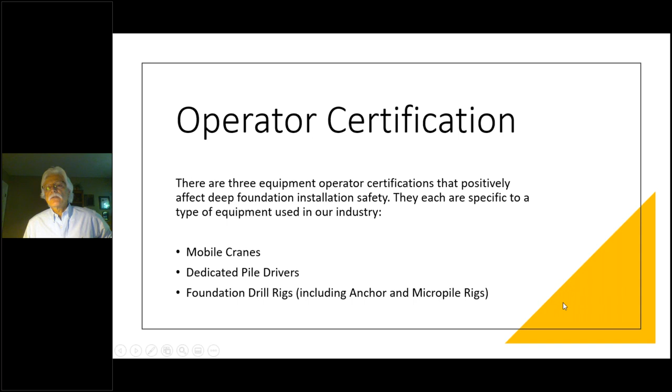However, at the time this was written, so this standard was written and came out in 2010, there was no definitive certification for a dedicated pile driver. So as we fast forward, one has recently been developed. Some of you are thinking, because of the term pile driver, that we're talking about a mobile crane with a pile driving attachment. And there's a difference there. So I wanted to make sure that we were clear on the differences of the two pieces of equipment.

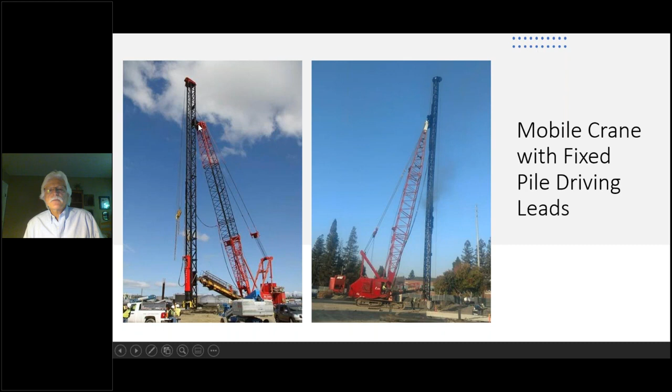And again, in subpart CC and some of the definitions, the term attachment. So this is referring to a mobile crane, but it may have, in our case, an auger or a drill or pile driving equipment. So to look at it, this is a lattice boom crawler crane, as this one is. This one has what's called fixed leads. So they're physically attached to the boom here, and also down here on the spotter. Same with here, this is the spotter. This is a physical attachment. So this is a mobile crane with an attachment.

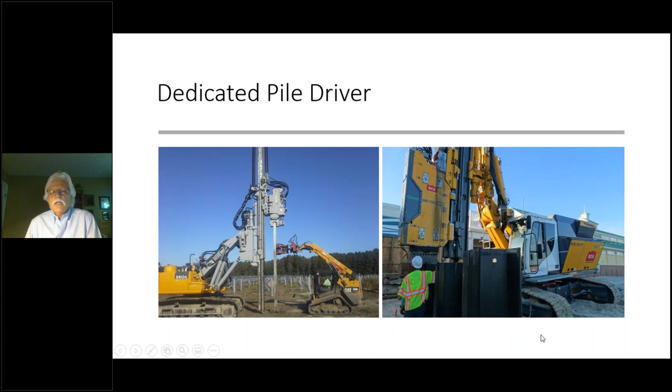So you have a vibratory hammer here. This is a much larger vibratory hammer. These are driving individual piles. This may be some sheet piles with interlocking H piles. All different variations of the same thing. But there's a true difference between a mobile crane with an attachment and a machine that's called a dedicated pile driver. So here we're driving sheet piles. This is driving a reinforced precast concrete pile. Similar machines, different from a mobile crane.

So we have a similar association out there. It's called the Pile Driving Contractors Association. They teamed up with the NCCCO to develop a new certification specifically for a dedicated pile driver. That certification became available in 2016. So you all know as compliance officers that there's now, throughout the country, a requirement for an operator of a dedicated pile driver to be certified for that type of machine, okay? So you now can be on the lookout if you see a dedicated pile driver in your area.

They're not terribly common on the West Coast, they're more common on the East Coast, but if you see a dedicated pile driver, the person in the seat should have, or shall have, in your terms, a certification for a dedicated pile driver.

ADSC, knowing in advance that certification for this type of machine was going to take place, opted as an association to get ahead of OSHA and create our own certification for a foundation drill rig. Internally we had numerous conversations, and we decided as an entity to create a task force.

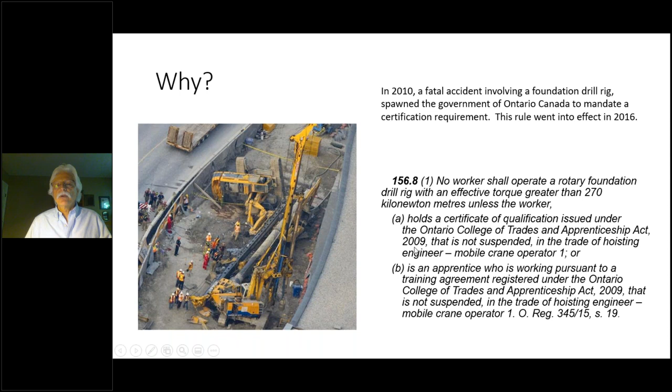A very large foundation drill rig hit a soft spot in the ground and rolled over. If you can see my cursor, this is the mast of the equipment - it totaled this machine, did so much damage that it totaled it. But unfortunately, underneath the mast here, right where these firefighters are, was a young man who was crushed running a small rubber-tired backhoe. This fatal accident triggered in the province of Ontario a requirement that the operator of a foundation drill rig have some type of certification.

Back in the States, historically, when we showed up on a job site as a contractor, someone from the owner or general contractor would probably ask to see some documentation that the person running the drill rig had some kind of training or authorization to operate it, and what their skill level and experience were. The typical response was for a contractor to write a letter on company letterhead saying our operator has X number of years operating this type of rotary foundation drill, maybe listing a couple of recent projects. That was pretty much taken for granted as good to go.

However, times have changed, we've advanced, and more owners and general contractors are asking more intricate questions. They want to know more, they want more documentation, they want to see records of training. So this is one of the things that triggered our association to get ahead of the curve and create our own internal certification.

It sounds like a great idea to become a certifying body. However, there's a lot more to it than just putting your name on a piece of paper and a stamp on it. We consider ourselves proactive and good at what we do, with a great working relationship with OSHA from a long history of working with them. So we decided, sure, we can do that, because we're contractors and we can pretty much do anything. Our motto is: we've done so much with so little for so long, we can do the impossible with nothing.

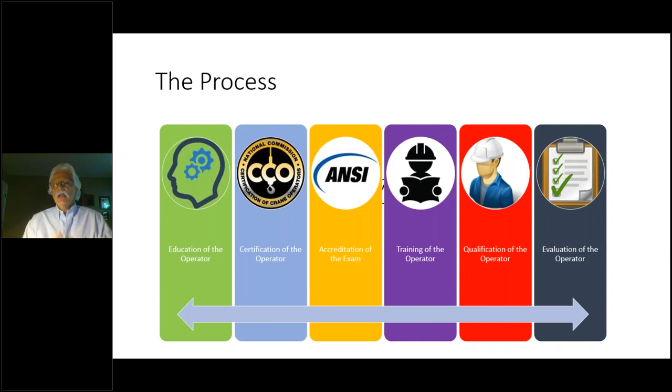Once you become certified, you then have to train the operator to operate the piece of equipment you're going to assign them to. Once they have the proper training, you as an employer need to qualify that and announce to the world, both externally and internally, that you have qualified this individual to operate that type of equipment. Piggybacking on the OSHA crane standard, we feel you must also evaluate the operator to make sure he or she can actually perform safe operation of the machine assigned and perform the tasks you ask them to perform.

So in the education, it could be schooling, both in theory and in practice. Ideally, the operator learns definitions and processes from either an instructor or a mentor. There's course material available and the opportunity to practice what they've learned in the classroom on an actual piece of equipment. Certification would occur after the individual receives appropriate education.

That education could come from a trade union, a trade association such as us, or some other educational institution. There are a few here in the United States.

Certification, the one you get from NCCCO, demonstrates that the candidate has skills and knowledge that subject matter experts have deemed necessary for the safe performance of a given type of equipment. The certification process was written by safety people, contractors, and subject matter experts in the field, in this case, the deep foundation industry.

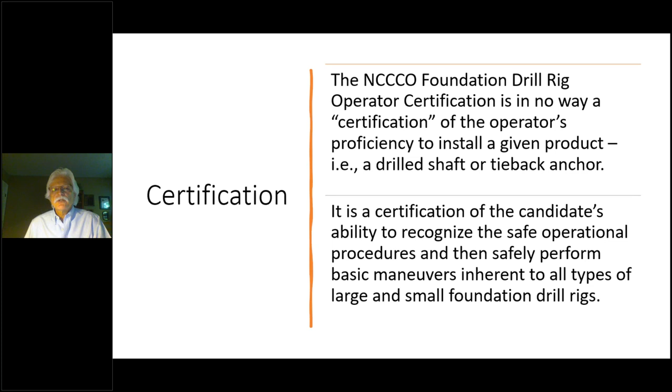NCCCO certification is in no way testing or certifying the operator's proficiency to install a given product, for example a tieback anchor or a drilled shaft. The certification is of the candidate's ability to recognize safe operational procedures and safely perform those basic maneuvers inherent, in this case, to both large and small foundation drill rigs. Remember, it's not a certification of how to install a product.

Accredited—ANSI has a very rigorous accreditation requirement. That's why we teamed up with NCCCO. There's no way an association like ADSC can even begin to meet those requirements.

Training—ADSC provides training, and a contractor can provide training. Once you pass the certification exam and understand the processes, you need to be trained on how to operate the specific machine you're going to be assigned to. They're similar in nature, but often have different functions. The controls may be slightly different—the triggers, the levers, the computer systems—they're not all the same. So one has to be trained on each individual piece of equipment.

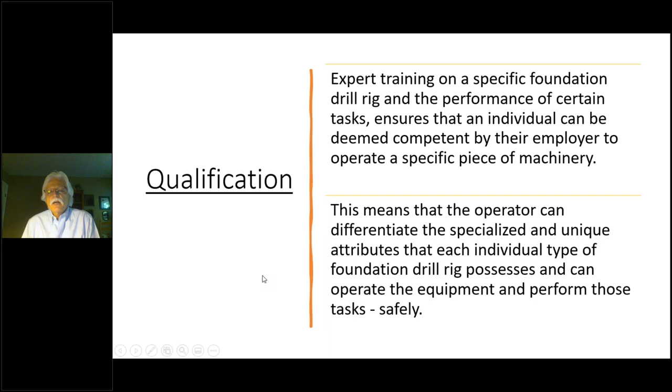Then the contractor should qualify that particular individual on performing not only operating the machine safely, but the tasks you're going to ask them to do. This means the operator can differentiate, so the more qualifications an individual can get, the more valuable they become to the contractor or employer. As I said earlier, based on the crane standard, we feel as a trade association that our members should also evaluate their operators if they're certified in foundation drill rig operation.

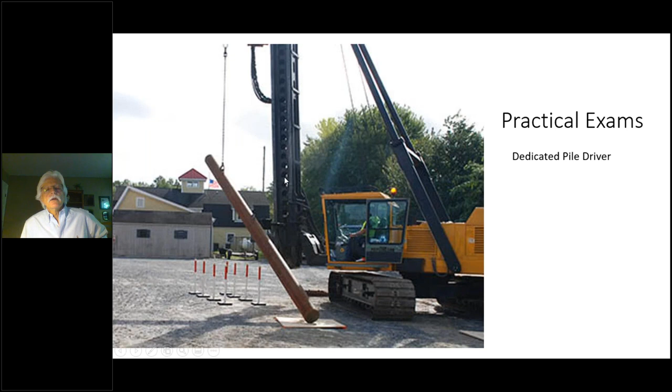This is a snapshot of a dedicated pile driver. Since they are cranes, they do lift things—so this is lifting a pile, you have to put it up underneath the hammer. So it's a fairly involved practical exam for each.

And do they police and check it? Most of it is on the honor system, but if someone files a complaint against an individual, NCCCO, because of their code of ethics, will respond and investigate to make sure the claims are either proven false, or if true, they may ultimately remove that person's certification.

Each of the certifications that NCCCO has have a 5-year lifespan. The Foundation Drill Rig Operator certification is likewise. You can recertify 12 months up into that time. You have to continue to meet medical requirements, follow the substance abuse policy, comply with the code of ethics.

You must pass the written to recertify. You don't have to take the practical unless you blow out of your 12-month window. For example, we are in the process right now - I'm on task force, we have to continually write questions because there's about 120 questions. As more people take the test and talk about the questions, we have to change them up or add new ones to make sure we're testing people's knowledge, not just a repeat of what someone else told them.

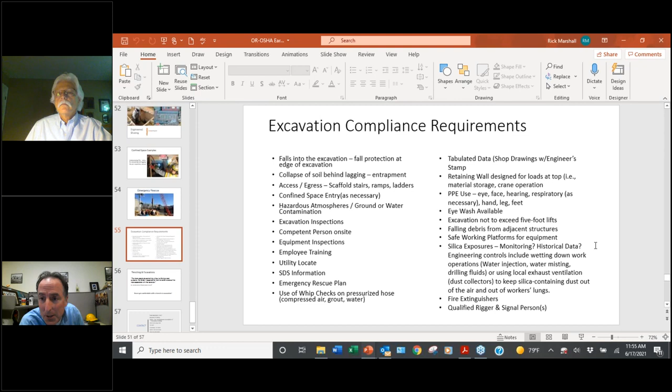Cool, how's that for a tease? I think they call that a tease in this business. Well, she's much better looking than I am, so that's a good thing.

Okay, so next up, we're talking about earth retention systems. Is that right? Yes, please. Okay, so here we go.

The whole trigger for this entire conversation was because this is excavation and trenching week in Washington, and I think in Oregon. So we want to relate it to that type of hazard that exists in our world. While you guys typically think of trench boxes, sloping and shoring and whatnot, we don't quite do that in the same way, so we want to describe it.

Based on some of the images you saw yesterday, you've seen some of these already. I'm sure you've been on job sites early on where you may have seen some of these structures already in place or actively being installed. So some of this may not be new to you, but we'll talk about it briefly.

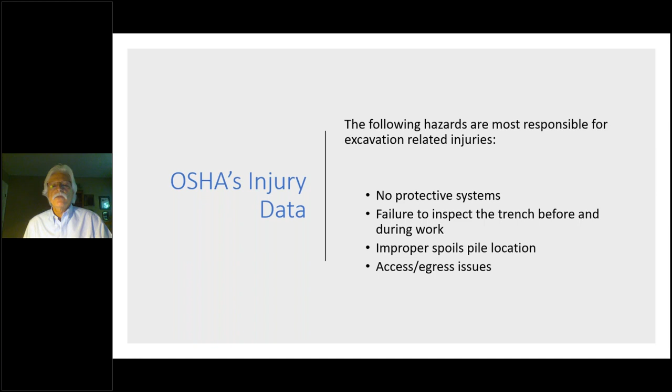Most of you are aware there are tragedies that take place, and it's interesting that 60% of someone who's injured or killed in a trenching or excavation accident is a rescuer. Could be a civilian, could be a coworker, could be untrained fire rescue personnel. It's an unfortunate thing, and it's not always just one individual. Sometimes responder number one becomes victim number two.

Cave-ins, as everyone hopefully is aware, can happen without warning. And all fatalities, I think most of you would agree, could have been prevented had we taken the steps to do so. Are there employer responsibilities? Of course there are.

We've got to provide training to employees who may be exposed to a hazard associated with trenching or excavation. That's such an easy statement to make, but unfortunately we don't seem to see a lot of that taking place, especially when you read some of the fatality reports that OSHA, Oregon OSHA, and Washington publish. We're supposed to, as an employer, educate, train, and then assign a competent person to be on site whenever trenching or excavation operations take place and we have exposure. The employer has to provide the necessary means, methods, and protections for all employees to safely enter, perform their tasks, and then properly exit the trench or excavation.

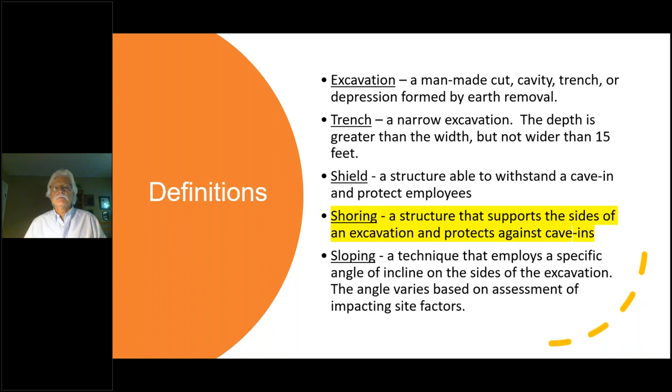We're going to talk about shoring here because it's one of the protective measures an employer can use to protect their employees from hazards. Shoring can be—most people think hydraulic, mechanical, or timber shoring—but we're going to advance that to another type of methodology. Employers shall protect employees from cave-in by using adequately designed protective systems. So we're going to show you some variables you might not be used to.

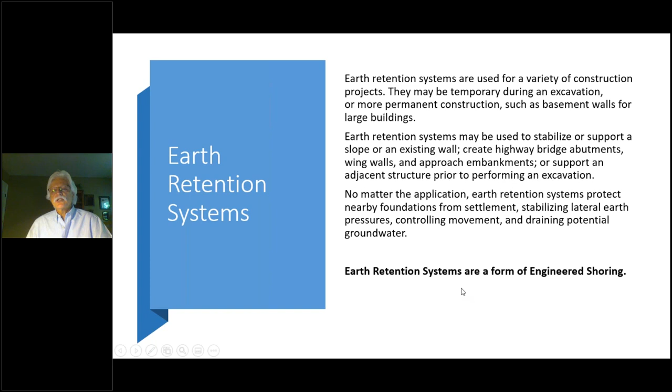We're going to talk about earth retention. Earth retention systems are used in a variety of construction projects. They could be temporary, or might be part of a permanent wall—most of the time in a basement for a smaller or large building or other structure. You've seen them on highways at the approach to overpasses. They may be used to stabilize or support a slope or existing wall, highway abutments, wing walls, embankments, or to support an adjacent structure. No matter the application, earth retention systems protect nearby foundations from settlement, stabilize lateral earth pressures, control movement, and drain potential groundwater. So in a sense, an earth retention system is a form of engineered shoring, to use OSHA speak.

Many different ways you can create that in our world: we can use sheet piles, soldier beam and lagging—Matt and Dan alluded to that yesterday—soil nails, shotcrete, bracing (internal and external), CFA or auger cast piles, secant piles, diaphragm walls, and chemicals. So let's take a quick look.

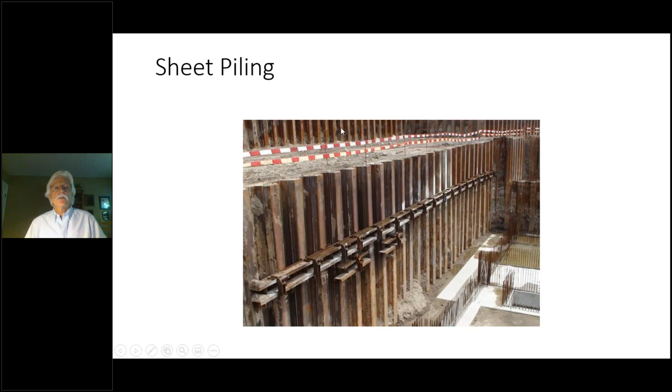Finished product—so we have the driven sheet piles. They've excavated out behind here; you can already see the foundations going in for the structure. So this is holding back the earth. We have some form of anchor system put through here—they've drilled through the sheet pile wall to anchor it back. This is a two-stage wall; we have the lower and upper levels here. So this is a pretty complicated job site.

You guys typically look around and you're looking for footprints up there. And when the contractor says, we don't have anybody up there, then you have to ask, how come I see footprints? You guys are sneaky sometimes.

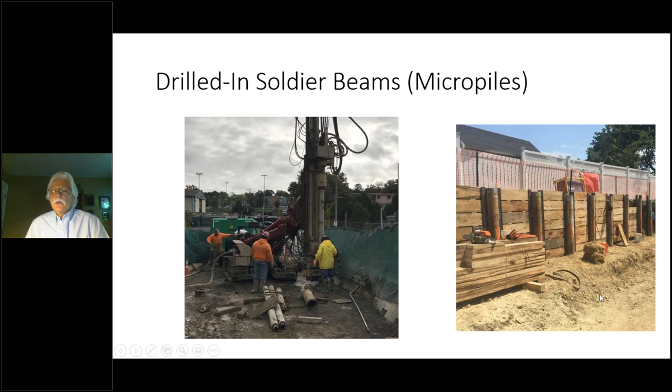Why do you do one over the other? Sometimes it's economics, how fast can you get to a job site, what equipment does the contractor have. Some months steel is really expensive, so concrete is the way to go. Other cases, concrete is way higher or I can't get it, it's not readily available, so you might drive piles instead.

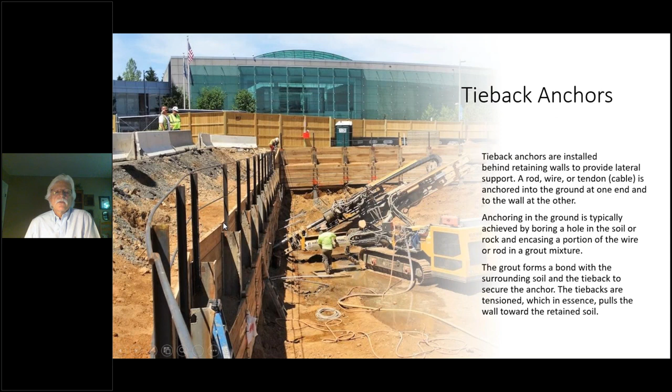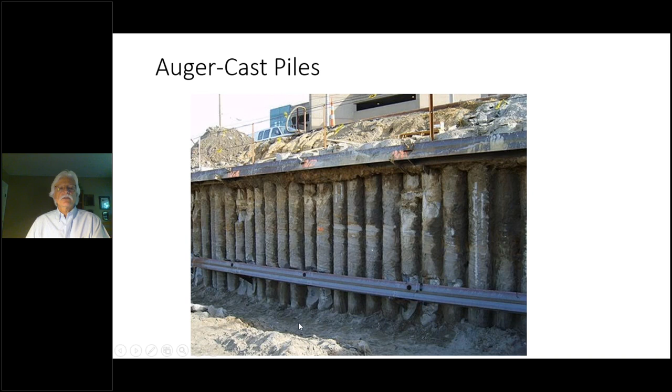Somebody from your organization asked about chemical grouting. So chemical grouting is a soil stabilization technique that uses typically, not always, a polyurethane chemical grout injection. So what am I talking about? Think of that like that expanding foam that you put in between your windowsill or a door frame or something like that. It's a product somewhat similar to that, only it's a lot more refined.

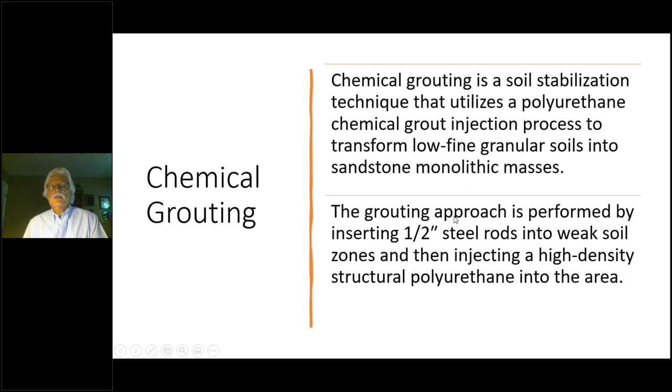What it does is it transforms fine granular soils into sandstone monolithic masses. So this tells you right now, it only works in granular soil. If you have hard clay, it won't do a thing. But if you have fine granulated material, gravel, sand type of stuff, this is a technique that you can use.

What do you do? You literally jackhammer a 1/2-inch diameter pipe into the ground in a grid pattern, and then you inject the chemical grout through there. And as you're injecting, you jack the pipes out. So you're pressure injecting this grout. So it looks like voodoo here, but the end result looks like here.

There's a term that we have called jet grouting. This is a method of ground reinforcement that uses a high velocity jet of grout, sand, cement, and water. Maybe not always sand, but definitely cement and water mixture. So what does it look like? Okay, so you have a drill steel. You can see these water jets coming out. So in this picture, they're cleaning the jets out with water.

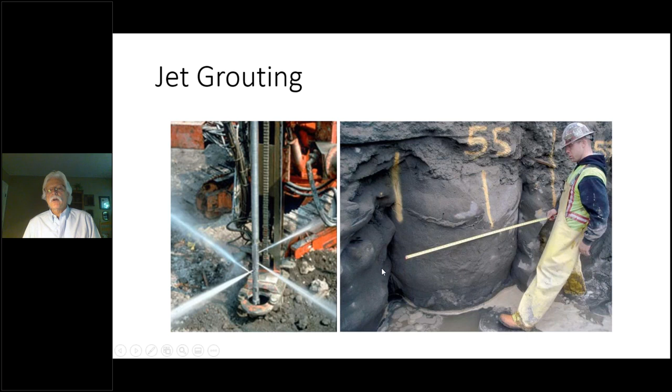But as this is drilling into the ground, grout squirts out under high pressure as it's rotating. And so you get an element that looks something like this, depending on the soil and the soil density. They may be larger than this, they may be smaller than this. But when you do these adjacent to one another, you can get a form of engineered earth retention.

There's a product called a diaphragm wall. Some people call it a slurry wall. This is just another methodology to create earth retention in our world. The trench excavation is initially supported by either bentonite or polymer-based slurry. So all these words say something, but it's better if you see the picture.

So how do you prevent that from happening? Well, you fill the void with this slurry. It could be made out of bentonite, which is a really fine clay material mixed with water, or it could be a polymer. So it's a chemical blend of liquid, water, and the chemicals. And what that does is it creates a stabilizing effect and prevents the hole from caving in.

So you're going, okay, well, how do you do that? Well, the weight of the bentonite or polymer mixture and the water together pushes out against the sides. So as long as you keep this full of slurry, you can continue to excavate and it will not cave in because of the weight of the slurry material pushing outwards against the excavated material.

Once that's completed and it's to grade, a reinforcing steel panel is inserted. Once that's to grade and everybody's happy, you inject concrete into the panel that you just excavated, but you siphon off the slurry mixture because you can clean it and reuse it. And once the concrete is to grade, it will harden.

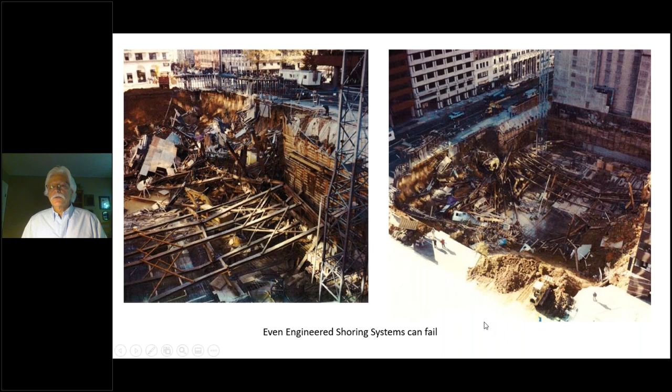Something everybody knows, excavations are the greatest risks: asphyxiation due to lack of oxygen. So there could be a lack of oxygen in the excavation, or the weight of the soil is crushing you to the point where you cannot breathe anyway. Could be some toxic materials. There could be a fire inside of the excavation. Moving machinery along the edge of the excavation could cause a collapse because soil vibrates, and I guarantee you, if you give soil a chance to move, it will.

Accidental severing of an underground utility. There have been a lot of people who've been killed by drowning because not only did the cave-in crush them, but it also broke a utility line, and then the trench or excavation filled up with whatever liquid was inside the utility line.

Earlier, we talked about having a competent person on site. That individual, by OSHA standards, has to be able to determine soil classification, has to understand the use of a protective system, and they better be fully understanding what the entire standard says, not just nitpick the important paragraphs, okay? Most importantly, they have to be capable of identifying a hazard and be authorized to immediately do something about the hazard, okay?

A lot of people get the first part: yep, that's bad, but they may not have the authority to eliminate the hazard. They can't stop the work. They can only tell somebody about it. This may be one of the reasons why people get injured or killed. However, what if the competent person is actually watching unsafe activities take place? That's not a good thing.

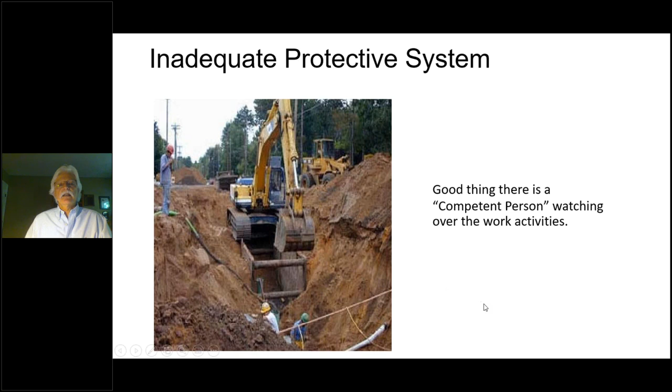So if you're a contractor, if you're an employer, you better make sure that your competent person is indeed just that and will not tolerate or allow an environment such as this. Okay, I don't even have to describe how idiotic that is. So we'll just move on.

One of the things a competent person has to do or make sure gets done is we have to inspect. So a lot of earth retention contractors that are ADSC members are compliant with this requirement, but some are still confused and they say, well, we didn't dig it, so why do I have to inspect it? Well, if you put people in harm's way, if you expose them to the hazard, in this case an excavation hazard, then you need to inspect it to make sure it's safe for your people to work in it.

So ADSC has this form. It's not perfect. It's malleable. You can change it to better suit your needs.

But we got to make sure before the shift starts. And if we have an incident take place, we have rain, we have snow, we have high winds or something like that. Water makes the soil wet and gooey. Sunshine dries the water out. So when you evaporate water, it leaves voids in the soil. So you may have a potential collapse, even though it's a beautiful sunshiny day. It's interesting how water can work for you or against you all in the same week.

And you can reasonably anticipate whether or not an employee is exposed to hazards by doing what? By inspecting before you put people in the excavation. There could be a hazardous atmosphere in there. Now, if you're working on sewage lines, probably a good bet, but if you're doing an excavation in the middle of a cornfield, it may not be. But there are some natural contaminants as well. So if it's deeper than 4 feet and you suspect, obviously you need to check.

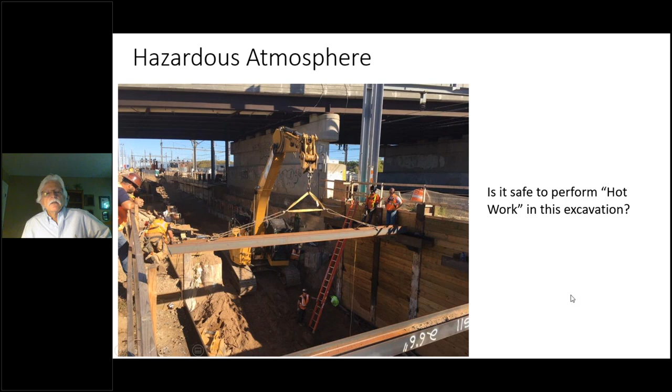So here's a typical urban. We're working underneath this overpass. They're maybe going to widen the road, maybe build another bridge, maybe widen the lanes. I'm not sure what's going on here. We have earth retention, but we have people down inside this excavation. We have equipment operating inside this excavation. Did we do an air quality check to make sure we're not, in this case, having a carbon monoxide exposure? A question to ask if you're a compliance officer and you roll up on this particular job site. Might question their rigging skills as well.

At depths deeper than 4 feet, you got to have ladder access or some kind of access in and out of the trench or excavation. At 5 feet, you must slope, shore or bench, do something to protect the employees. You have to travel no further than 25 feet to reach your access or egress point. And if you use a ladder, it has to extend 3 feet above the lip of the trench or excavation and be secured. This is an improper way for access and egress. Okay, it's clever, but not appropriate.

Yesterday, we talked a little bit about underground hazards. Since we typically drill into Mother Nature, to find something like this would be somewhat alarming. So make sure you call before you drill, in our case. Physically locate prior to drilling. Just because there's marks on the ground doesn't mean they've located every single utility. So as Dan and Matt both mentioned yesterday, it's far better to pothole to make sure you haven't found something that no one knows about.

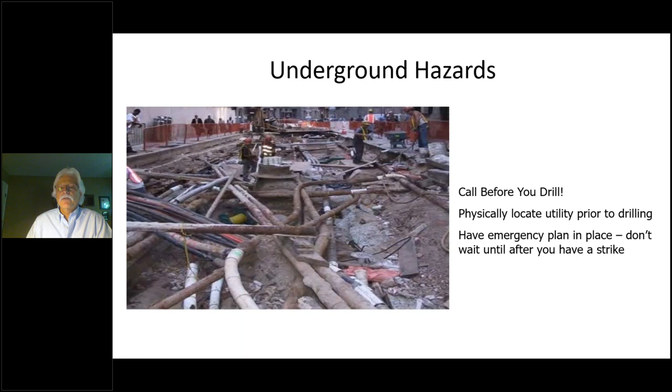Pretty key elements, proper planning. Okay, if you fail to plan, then you plan for failure, so to speak. Call before you drill. Pothole. Should have a site-specific hazard analysis to make sure you've covered your bases. And you better make sure you have an emergency action plan should you damage a utility. Oftentimes people do all of those, but fail to have the phone number for the gas company, electric company, the water company. They don't have those numbers posted in their job site trailers. So it's a good idea to have them. Calling back 811 isn't going to be a very fast response.

Hopefully everyone listening understands the weight of soil. If you have a cubic yard of soil, so you have 3 feet by 3 feet by 3 feet, that can weigh 2,700 pounds, depending on the density and the water content of the material. So let's just say 3,000 pounds. That's a significant amount of weight in a block of soil.

A skid steer with a 1 cubic yard bucket, if you filled it up and dumped it out on the ground and showed a typical field person, they would scoff at you telling them that pile of dirt weighs 3,000 pounds. But if you showed them a small pickup truck, they would say, oh yeah, I believe it weighs 3,000. It's the same thing. So which one would you like on your chest? The pickup truck or the pile of dirt? Well, hopefully they say neither.

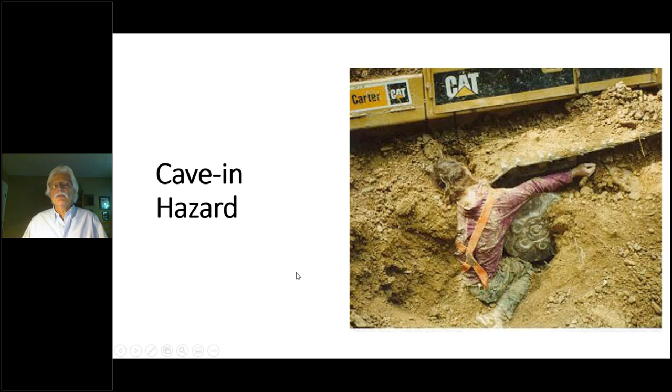And people who think they're going to be fast enough to get away from it, they're only fooling themselves. I'm going to try to show you this video. You got to pay attention to it. See this person right here? I hope you can see my cursor.

So how long does it take for a cave-in to take place? Well, you just saw one. You saw someone die. So I'll show you again.

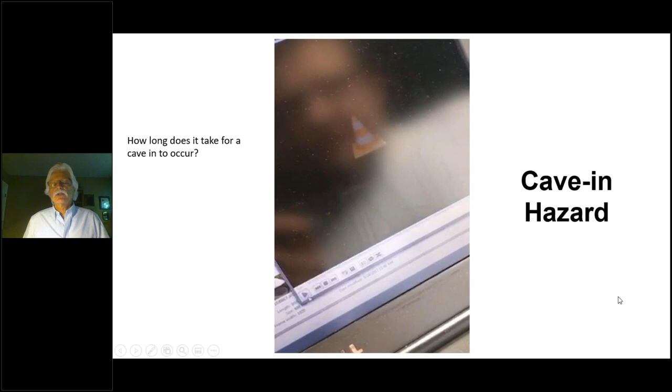Luckily, that gentleman had the wherewithal to grab onto the clamshell, and he was pulled out. It took not minutes, not hours, but most of the day. They worked well into the night to recover that individual that was buried. So unbelievable. So when people ask, well, how fast does it happen? Literally in the blink of an eye.

If you're installing earth retention like we've been showing you, a lot of people are right up next to it. They have to be here. So they're physically installing these boards. They're manhandling them. They have to get right up against it. But in some sandy soils around the country, oftentimes the material, just under its own sheer weight, boils out from underneath the earth retention.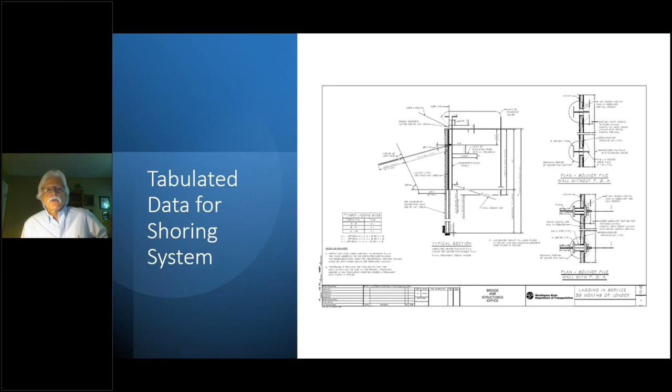So we know this about engineering shoring. We have to have what's called tabulated data, how to put in wales and whatnot. So the tabulated data for an earth retention project should be on the contractor's engineer drawings, shop drawings. There should be information on site indicating how the wall was designed, how it should be installed, what angles, how all the tiebacks in this case, the type of wood, the material, the thickness, all that should be clearly identified and on site so anyone can figure out how to install this and do it correctly and have it be safe to protect employees.

We try to limit in our world excavations to only 5 feet in depth. So how do you know you're 5 feet deep? If you're a compliance officer, most everybody I've ever met at a construction site is at least 5 feet tall. So if there's boards over the person's head that are working there, it's probably deeper than 5 feet. That's a trigger. It's what I use all the time. And I question people, how tall are you? Oh, 6 foot. Okay, so you have dug too deep.

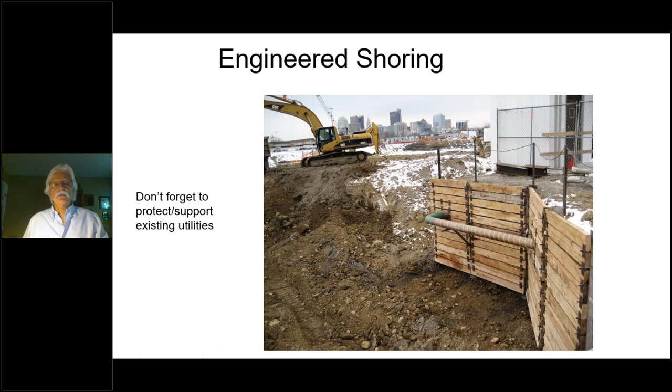Oftentimes there's existing utilities that you have to prepare and take care of. So this one is properly supported. This is a natural gas line, so we have to make sure we are extra protective of that. We have to be very careful.

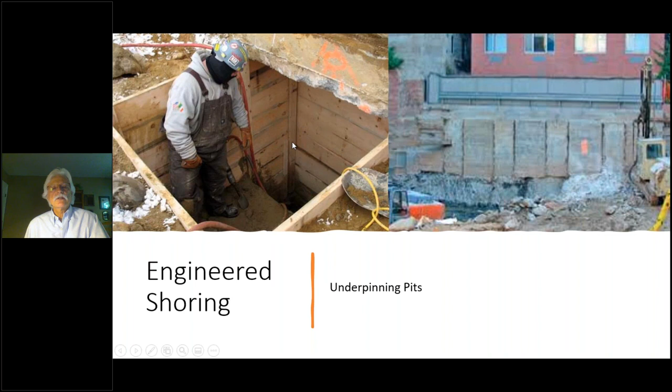This is an older picture, so you don't see any fall protection. I get that, you guys are all screaming, but this is the process. We've improved how we do that. We treat it as a confined space now, so you see we now have fall protection. In this case, this gentleman is wearing a respirator because he's possibly chipping out rock down there, so we want to make sure he's not exposing himself to anything foreign, particularly silica-laden material.

That job I told you about at the football stadium, when I worked for a contractor, we called Cincinnati Fire Rescue. They came out to the site and practiced rescuing people from underneath the seats of the football stadium. So we made it a point to have fire rescue come to the job site and explain to them what we were doing, how we were doing it. So in the event we actually called 911, they were prepared to do a confined space rescue.

I strongly recommend those of you who are listening that you do that for every excavation and drilled shaft project you do, because you never know when you're going to need help. And when they come, they need to know what to do.

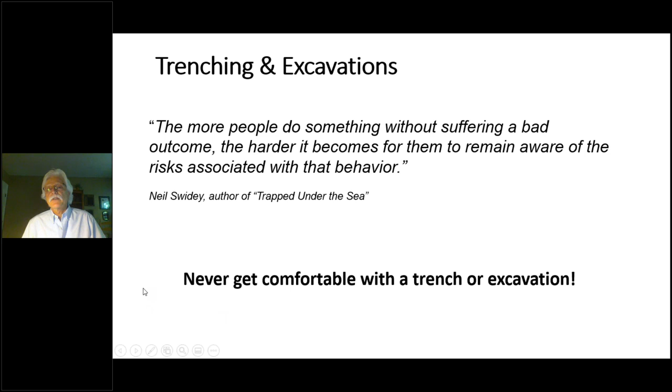A friend of mine made this comment in the book he wrote, Trapped Under the Sea: the more people do something without suffering a bad outcome, the harder it becomes for them to remain aware of the risks associated with that behavior. So I'm just warning everybody to never get comfortable with a trench or excavation, because it literally can turn around and kill you.

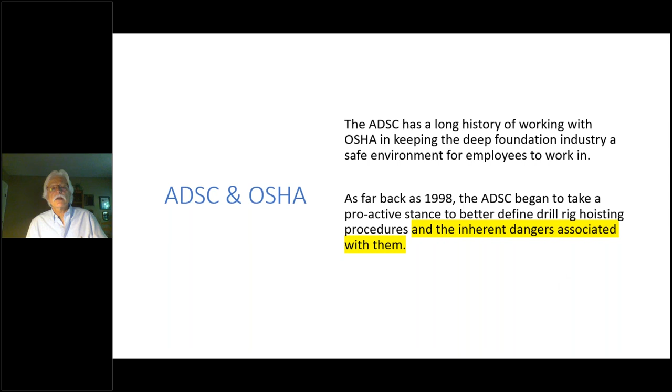We work with many, many drill rig manufacturers to create informational procedures and warning labels. We actually created warning labels and had language inserted in numerous manufacturers' operators manuals to indicate that a dedicated drill rig is not a crane, but if in fact you lift loads with one, you have to do it within the prescribed methodology that the manufacturer says. We have extremely limited ability for hoisting, and that has to be clearly defined by the manufacturer.

So during 2003, remember subpart CC was put into effect in 2010 - this gives you an idea of the timeframe, how long it took to create. In 2003, members of ADSC were invited to speak at the CDAC, the Crane Derrick Advisory Committee.

We made a presentation at a public hearing to talk about dedicated drill rigs and why we felt they should be excluded from subpart CC requirements, i.e. being defined as a crane. We told the audience that because drill rigs have limited hoisting capacity, extremely limited working radius of the suspended load, and limited ability to do what most people call a load chart, they are basically an ineffective piece of equipment to use as a crane.

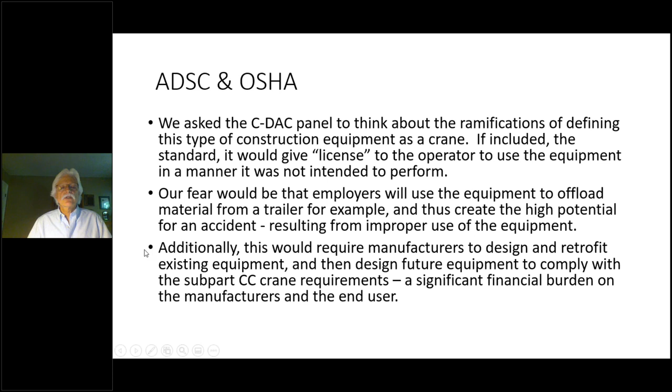I'm going to try to explain that. First, a little bit about what foundation drill rigs are. All these machines I'm going to show you are basically designed to install what we call a drilled shaft. Some people call them drilled piers, some call them caissons - they have several different names. Essentially, we auger a hole to whatever diameter and depth, extract the material, and then backfill that excavated cylinder with concrete and reinforcing steel.

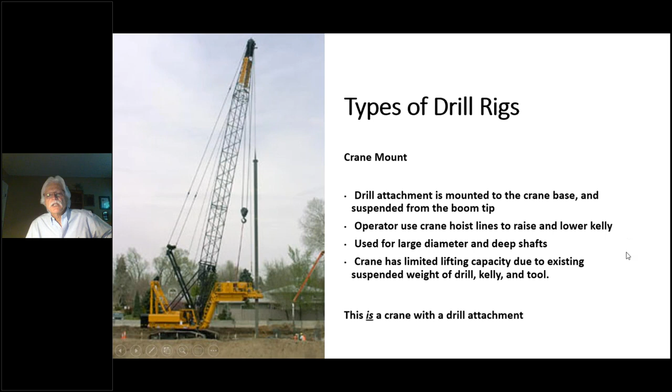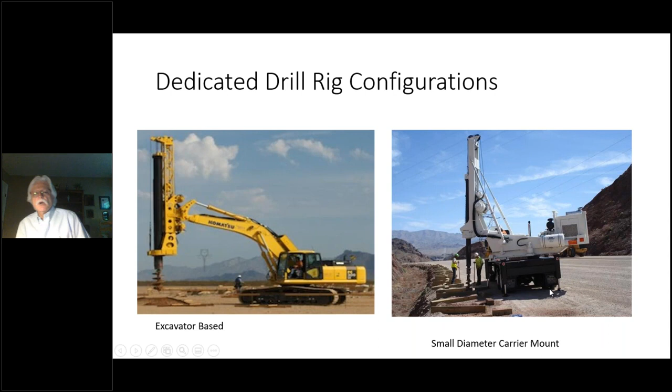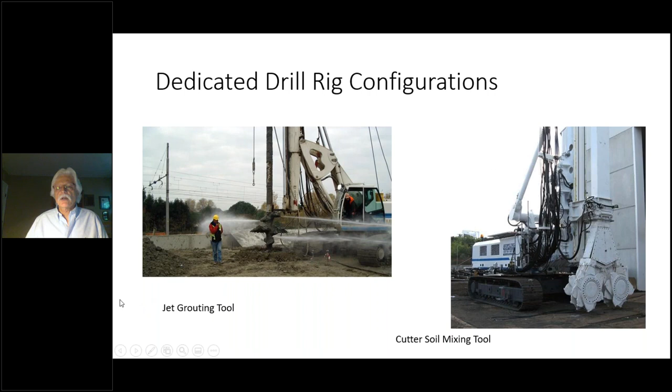Yes, this morning I showed you the jet grouting tool. So here's a larger version of the same thing. They're washing it out as we speak. So you can see the jets of water coming out. This attachment is called a soil cutter wheel. So again, it's on a dedicated drill rig, but a different technology used to install a different product.

Now, any one of those machines, if they're equipped with an auxiliary hoist, has the ability to lift objects. Some people use it to lift that casing that I just described that they can attach to the rotary and then install it as they're drilling. Some machines are used to lift a reinforcing steel cage. Okay? So there's several different things that this machine physically can do. The manufacturer indicates what you can do with their machine. Just because it can physically do it doesn't mean you should do it.

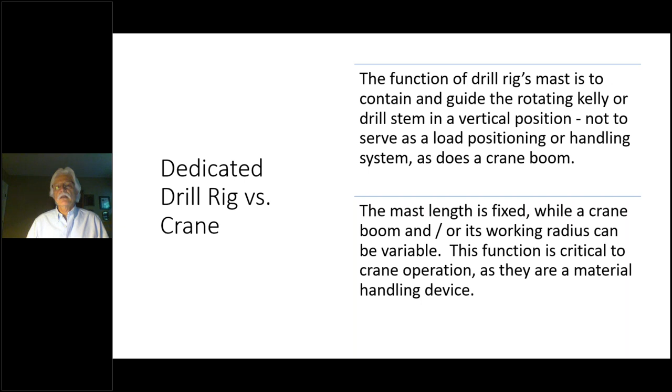So part of our argument to OSHA was that the function of the drill rig's mast, this piece right here, is to contain the rotary and keep the rotary and the Kelly bar in a vertical position. It's not to serve as a load positioning or handling system, much like a crane boom is. The mast length is fixed, while a crane boom, especially a telescopic boom crane, can change its radius in and out quite a bit. A dedicated drill rig has a very limited ability to increase or decrease its working radius. So technically speaking, it's a pretty poor material handling device because of the limitations that it has.

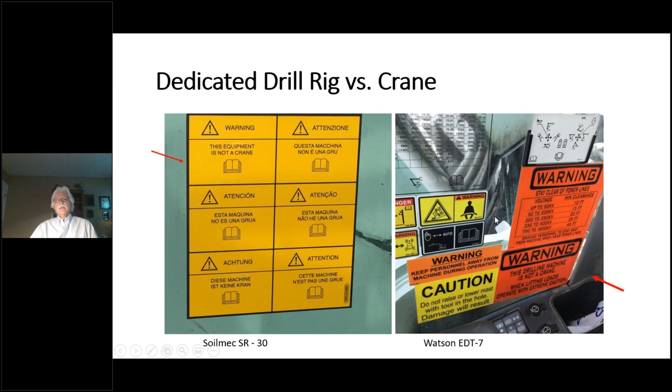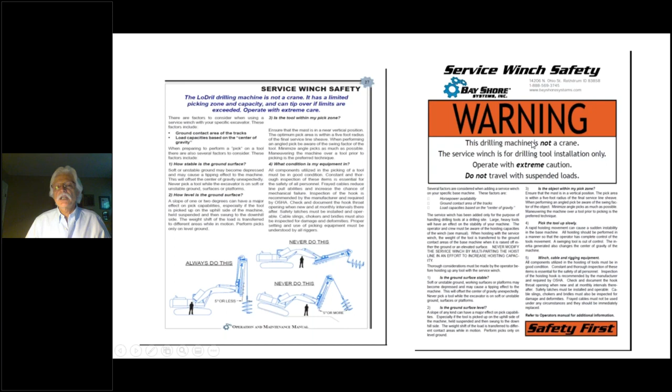This is a page out of their operator's manual. This is another page out of their operator's manual. Notice it's almost the same identical warning sticker that we created. So not only is it in their machines, but it's also in their operator's manual. So I just discussed the 5 degrees of verticality, so it's pretty limited.

There's not a specific standard that I can remember off the top of my head in federal OSHA that cites that you must follow the manufacturer's recommendations, whatever it says in their operator's manual, but that paragraph has been cited numerous times. It's also going to be used for a general duty clause. So basically, if you have an operator's manual for any piece of equipment, a handheld drill for that matter, and you're not following what the manufacturer tells you to do, it's at a minimum, in my opinion, a general duty clause violation.

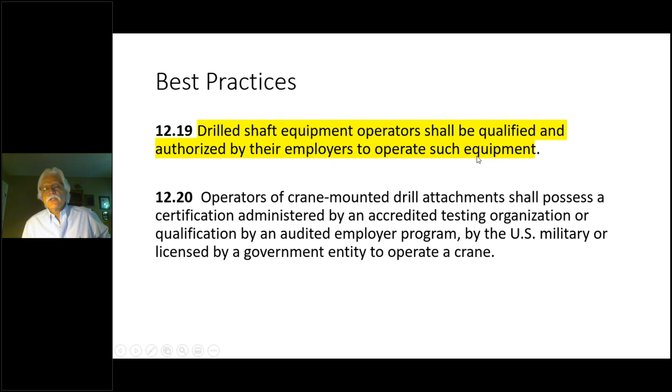Drilled shaft equipment operators shall be qualified and authorized by their employers to operate such equipment. I don't know if I mentioned to you when I talked about the NCCCO certification that the foundation drill rig certifications are voluntary. They're not mandatory, they're voluntary. Dedicated pile driver, definitely mandatory. So we worded it so it's not mandatory because at the moment it's still voluntary.

Assuming that the manufacturer allows the use of the auxiliary winch for lifting loads, we as ADSC strongly recommend that a lift plan is created. I think Matt yesterday, when he was talking about lifting reinforcing steel cages, talked about creating lift plans to do that. Well, we strongly recommend and encourage that if you're using your dedicated drill rig to lift something other than the tool, the contractor that's doing it creates a lift plan for that physical operation.

So what does that mean? I don't think it's on our website, but I have access to a generic lift plan made specifically for a foundation drill rig. I offer it to people all the time. If someone in the audience wants to see a copy of it, I have no problem.

But if you roll up on a site and you see someone using a dedicated drill rig to set soldier piles or lift a cage or do whatever they're doing with it, it might be a question to ask if the manufacturer allows that and what is your policy on doing that. I'm trusting that a prudent ADSC contractor member would already have that information on hand, but hopefully you don't run across it, but I would suggest that you ask the question.

Just because we have an exclusion from subpart CC, that's the actual exclusion number for a dedicated drill rig, that doesn't mean we don't have to comply with other requirements. Matt and Dan both talked about fall protection issues around a drilled shaft. We have exposure to pressurized lines on hoses. We have housekeeping issues that Dan talked about. We have training requirements. We have rigging training requirements. We have potential confined space entry and emergency rescue requirements that we have to comply with.

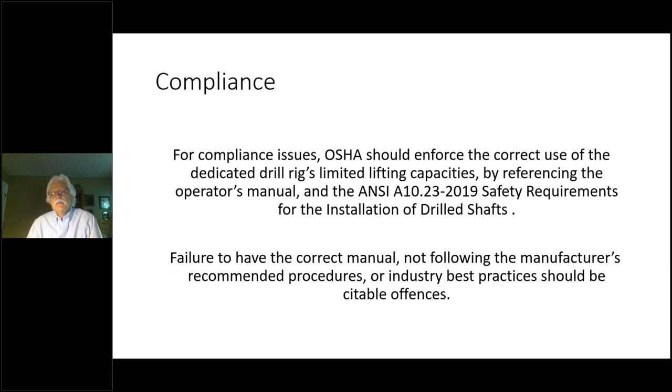But failure to have the correct, or not even have a manual for operating the equipment in question, that might be a citable offense. And not following what it says, if it says specifically do not do this in the operator's manual, and then the contractor is doing it, that's a shame on you kind of a situation.

So 1926.20 requires you to develop a safety and health program and have frequent regular inspections by a competent person of the job site, materials, and equipment. And .21 talks about training about the hazards that employees might be exposed to. So that's all a part of working around a foundation drill rig. So, several conditions. I'm not going to tell you how to do your job, but I'm just telling you that the general duty clause might be something that you might have to use if you see someone using a foundation drill rig inappropriately.

So just to brag on our association, if you've ever sat down and read a Federal Register, they're quite entertaining. But if you need to sleep, I would recommend you read it. But in the August 9, 2010 one, if you read it, you'll find that a trade association supported the proposed exclusion. So that was what I was trying to explain to you. So we got famous for 15 seconds anyway.

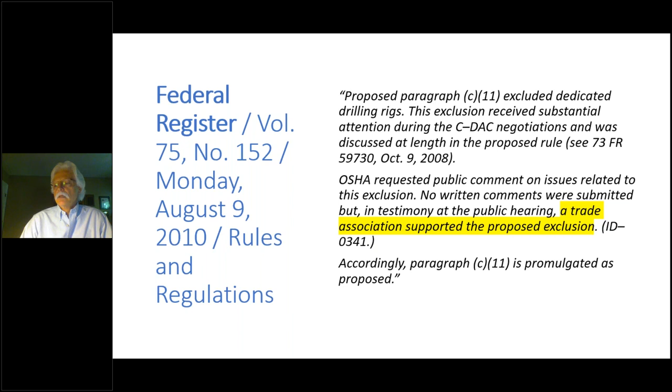So if there's any questions about the difference between a mobile crane and a foundation drill rig, I can take that if you want, or you want to wait to the end, your choice. Rick, I do not see any questions in the queue, so please carry on, my good friend. Okay, oops, we'll zoom on here.

Short story, when I was a small child, my father worked for a foundation contractor. He took me out to a project and I sat on the lap of the crane operator as it was driving piles. It was a very cool day for me. That happened a long time ago and I have a very vivid memory.

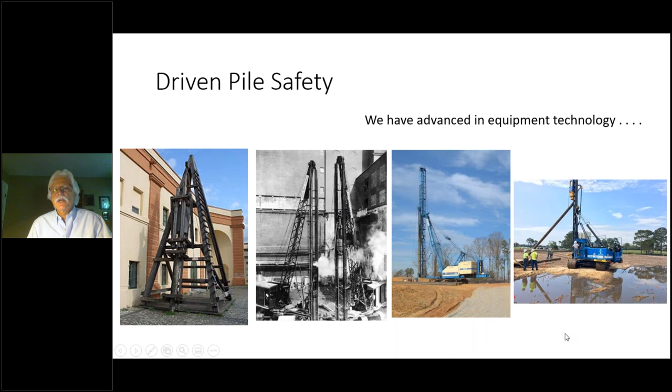So there are many different mechanisms in place in our deep foundation industry to install a driven pile. There are some regulations out there. OSHA has regulations on pile driving - they're pretty old, pretty minimal. There's an ANSI standard for driving and extracting piles. And for those of you who've worked on an Army Corps of Engineers project, the infamous EM 385-1-1 also talks about driving piles.

Hopefully everyone in the room is familiar - ANSI standards are not law, but they can be incorporated by reference. There are several incorporations by reference about cranes; B30.5 comes to mind, so it's not uncommon for OSHA to do that. Army Corps of Engineers standards are also not law, but you definitely must adhere to them if you're on a Corps of Engineers project.

The Pile Driving Contractors Association, which I mentioned earlier, has what they call a Pile Driving Safety and Environmental Best Practices document. It's available on their website. If you want a link to that, I'll give it to Craig and hook you up with it - just remind me, Craig, if that's what you want to do. And then there are standards from OSHA, but they're kind of limited and very outdated.

You've seen these pictures before, so I'll blow through them here. This is fixed leads - the pile driving leads are actually attached to the crane at the boom tip, and also to what I call a spotter down here at the base of the crane. So we have pretty limited reach or working radius, but you get a tremendous amount of control when driving the pile. The operator sitting in the seat has to be certified for this, a lattice boom crawler crane - not for driving the pile, but for operating a crawler crane. But just because they're certified doesn't mean they've been trained on how to operate a crane with all this attachment, and how to safely drive a pile with it all attached to the lattice boom crawler.

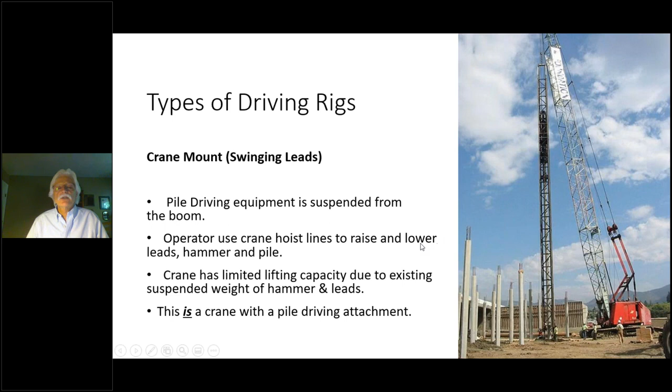This is similar, only instead of being fixed, these are swinging or hanging leads. Again, the operator is certified for a lattice boom crawler crane in this case, but must be trained and educated on how to use this type of equipment - it's pretty tricky to lift. You see these leads in a vertical position, but at one time they were assembled lying down, so how do you lift them without destroying them? That's a skill, a technique you need to be educated and trained on. Hoisting the hammer into the leads is a skill. Knowing when to shut the hammer off or when to do this or that is a skill you have to learn - you just don't get it because you're certified to operate a lattice boom crawler crane.

A vibratory hammer rotates eccentric weights, causing the hammer to vibrate. When the hammer vibrates, it drives the sheet pile, in this case, into the soil using the weight of the hammer. These sheet piles are driven to grade and being installed—it's a technique, believe me.

The whole assembly is usually held by a mobile crane, but you'll see more and more that dedicated pile drivers are in use.

One thing it does do: if the hammer is not inspected and not operating properly, it will cause vibrations to be transmitted from the rigging back to the hoist line, back into the crane. So as compliance, you might want to check that they're doing pre-shift inspections of not only the hammer and the power unit, but of the crane.

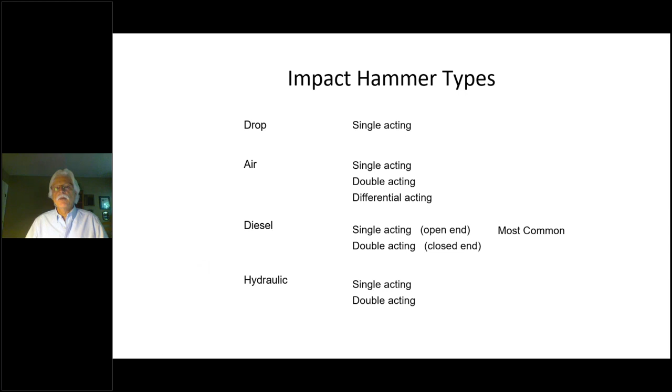The last pile driver you'll see is the dedicated pile driver we talked about earlier. Again, there are many different variations of the same thing, but this operator and this machine have their own certification—not crane certification, but dedicated pile driver certification.

Dedicated pile drivers have their own set of standards in subpart CC. There's not a lot, but there's some in there. OSHA clearly understands these pieces of equipment exist. They were unable to get them excluded from being defined as a crane, but they do have some lifting capability, so it's probably a good idea to know the rules.

This machine, like most, has a pretty brief load chart. It will tell you the angle of inclination the mast can be at. It will probably tell you that in order to do that, you have to put the mast onto the ground for greater stability. It may limit how much weight you can use and what kind of radius, and it may forbid you from walking. Depends on the manufacturer.

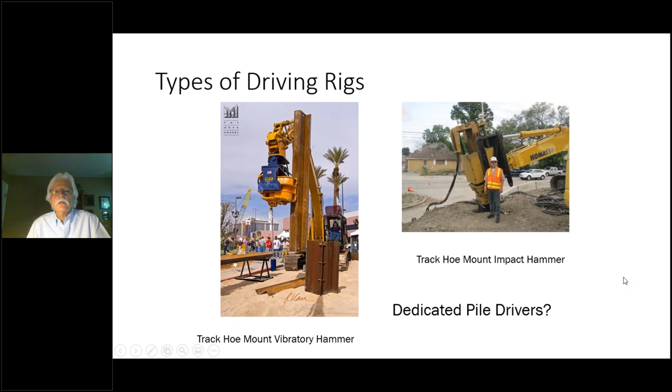Employers are expected to consider any existing consensus standard - that's what we talked about, the ANSI standards. Even though they're not legally required, consensus standards represent what experts consider a safe operation. So in my opinion, you should comply with voluntary standards, much like you should comply with OSHA standards, in our case here in the States.

So we talked a little bit about that. In the ANSI standard for pile driving and extraction, it tells you the contractor should develop a written site-specific safety plan. That plan might incorporate how to use this type of hammer. We talked about call before you dig, so I won't dwell on it. But it talks about how you may see a mobile crane, typically with a power unit mounted to the rear of the machine.

But this is weight that goes beyond the crane's counterweight. So does this manufacturer allow you to add additional counterweight and still not affect the crane's rearward stability, as crane manufacturers call it? Maybe, maybe not. Most manufacturers that deal with the deep foundation industry have made concessions to doing that. However, the mounting should be designed by a registered professional engineer familiar with the industry.

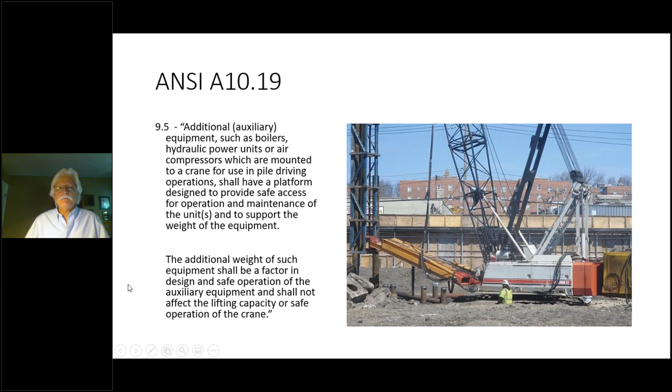Sometimes - a question was asked earlier about getting close to the work. While we're excavating, sometimes you've got to get close when you position the freely suspended leads over the next location. So people have to get close by. To do this with a tag line isn't impossible, but it's very difficult to fine tune getting it exactly on the spot. So people have to be very cautious of that.

These people need to be trained. The conversation, whether verbal, by hand signals, or even a head nod, between the people down here and the crane operator, has to be very explicit. Oftentimes you can't use the quote unquote proper crane signals listed in ANSI and OSHA requirements. A head nod may be a very accurate signal, but everyone on the site needs to know what that head nod means. Otherwise, you're going to have confusion and probably injure or maybe even kill somebody.

The ANSI standard tells you to set up an exclusion zone to keep people away from the pile driving hammer. This is obviously a staged photograph showing how great all the employees are, but you need to keep all these people away from the actual pile driving operation. More often than not, people have no idea what's going on, but they're curious and they need to stay away. Most people who drive piles keep people away - just the noise itself is a detriment to being there, but there's people who are very inquisitive.

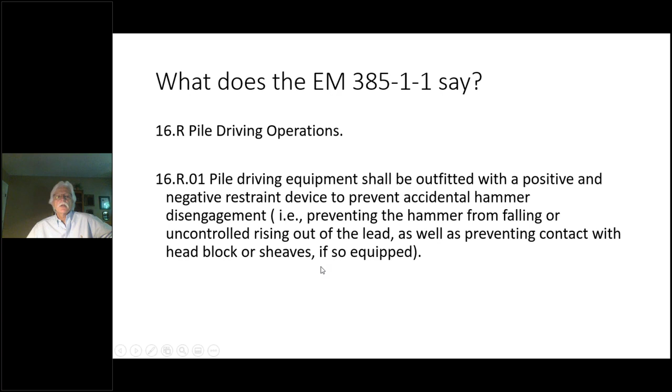So I showed you this picture earlier. There's a requirement that says equipment shall be outfitted with a positive and negative restraint to prevent accidental hammer disengagement. Well, that's crazy - you would think we'd already have that. So, uncontrolled rising out of the leads, as well as preventing contact with head blocks or sheaves. So nice on a piece of paper, but what does that mean?

They were working underneath, I believe, a power line. So it's a pretty common thing to do.

There was no stop to prevent the hammer from coming out of the leads. That's why this is in EM 385 1-1, and it's also in the ANSI standard. Unfortunately, in this case, safety is a reactive thing—we had a bad fatality accident, and we had to make sure it never happens again, so we incorporated it into safety standards.

Weekly documentation of the pile driving leads—it's not just the cranes, the booms, the counterweights, or the connecting points. The leads themselves suffer a lot of wear and tear. There's impact, stresses, and strains—all kinds of things happen when you drive a pile. So they need to be inspected. The Corps says weekly, and I agree at a minimum, but you should also do a cursory inspection pre-shift, in my opinion.

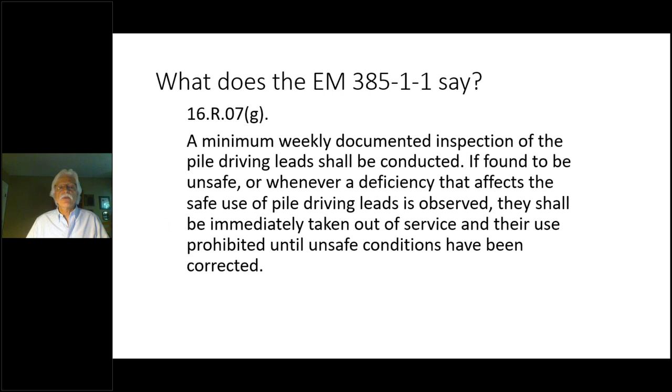How did it happen? We don't know exactly, because we're all standing there gaping, going, how'd that happen? Who screwed up? All the fingers were pointing in every direction, but we couldn't figure out why.

We had several different cranes come in. We lifted and cut this piece off, using 100-foot aerial lifts. We cut all this out as safely as we could, lowered it to the ground, and then did an inspection.

We found that over time, part of the lead section had rusted at a weld joint. Because a weld often has pinholes, over the years water got into those pinholes—this is a piece of square tubing. This contractor is in Ohio, so we have freezing and thawing. When water freezes, it expands, and that further drove the crack to be even bigger. This is a weak point.

We found in our investigation that this was the cause of the lead failure. Could inspection have prevented that? Of course it could, but it's pretty hard to inspect something 100 feet in the air. So how do you do that?

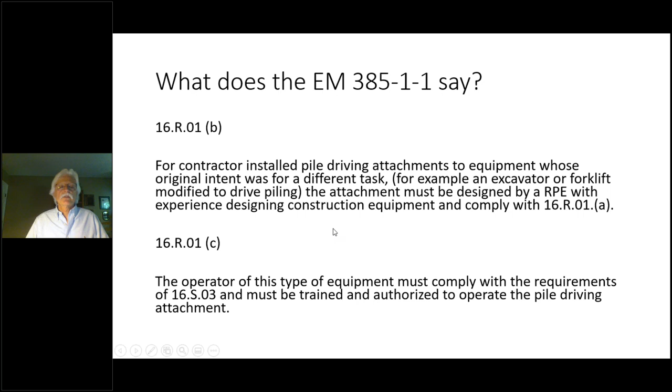If you're adapting pile driving equipment—this is Corps of Engineers speak—to a different unit, like a forklift to drive piling, you have to train the operator on how to do that. This is an industrial forklift. The operator has to have forklift certification, we know that, but now they also have to be educated and trained on how to use this attachment.

If you attach, in this case, a hydraulic impact hammer to a forklift, this connection point has to be designed by a professional engineer to make sure nothing can happen. And of course you have to inspect the forklift, the mast, the forks, the connection, and the hammer itself.

I like to say when you drive a pile using an impact hammer or a vibratory hammer, the whole unit goes into self-destruct mode—it's beating against itself and things wear out. So you've got to constantly inspect them, and if you see a problem, you've got to repair or replace it.

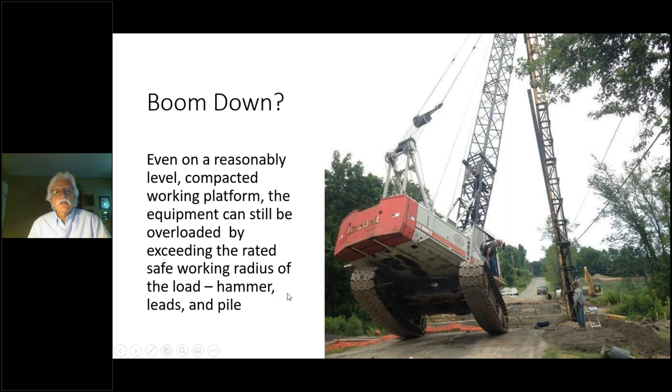So they constantly have to be aware of the rated safe working radiuses and know the weight of the piling leads, in this case the piling hammer, and the weight of the pile. And this is slightly downhill and not level, so if they had this load suspended, that load is going to drift to the low side and maybe away from the crane. It's conceivable that just the weight of the suspended load drifted out further than the assigned radius and started this machine to overturn. They probably weren't doing anything except the operator probably quickly set it down. Don't know for a fact, I'm speculating.

So how could you destroy a brand spanking new lattice boom crawler crane simply by driving a pile? Well, if you're not careful and not paying attention to what's going on - driving forces affect the crane, but extracting, when you're using a vibratory hammer, you can drive the pile into the soil, but you also have the capability of pulling the pile back out. Why would you do that? Well, maybe it's going out of tolerance, maybe it's driving cockeyed or crooked, maybe you don't like the position. So you can pull it out and have a do-over essentially. It's a pretty neat thing to be able to do.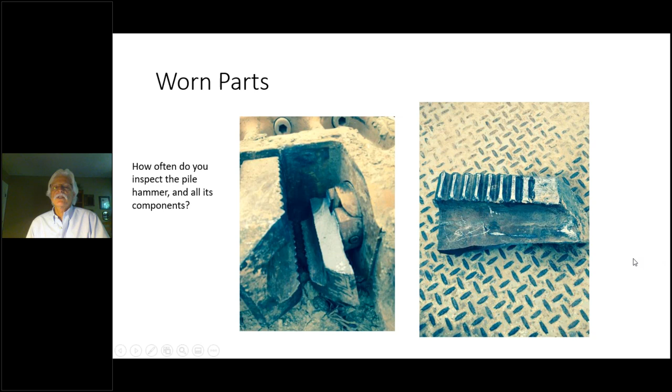So the simple extracting of a pile can cause a tremendous amount of damage if inspection is not taking place, if the operator in the crane is not familiar and doesn't understand what can happen when you not only drive but extract a pile in this case. So all the talk about training and education is paramount to keeping things safe when you're in the pile driving world.

When you cut off a pile, these are driven to grade. These are driven to the proper depth, but we have excess amount. So if someone comes in here and cuts them off to the proper grade, it's very common. Could be pipe pile like this, could be wood piles, could be H piles, could be concrete piles, doesn't matter. That's a very common thing to have to cut them off to grade for the foundation cap that goes on top of it. But in this particular incident, this company had a plan on how to do this.

They had set up an exclusion zone, they had a technique, but unfortunately the individual doing the actual cutting did not follow the procedure to some degree, and they also allowed an inspector who was just doing his job into the exclusion zone. The inspector had his back to the operation, and when the gentleman actually cut the pile off, it fell. That was their plan, to have it fall, but there wasn't supposed to be anyone in the exclusion zone. And you can imagine the pipe hit this gentleman and killed him almost instantaneously. So we're not even driving a pile, we're cutting them off, but the hazards still never, ever go away.

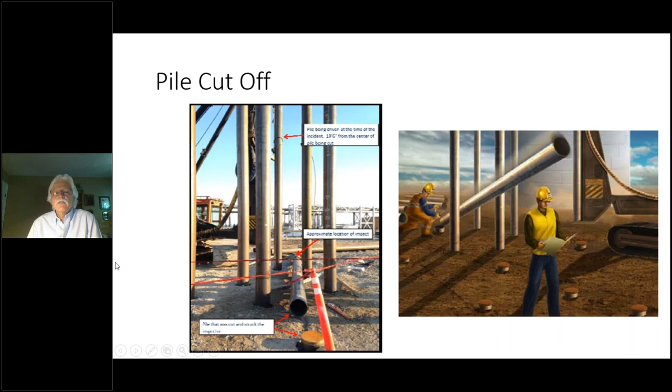This is a job site in Louisiana. If you remember, they had a little storm called Hurricane Katrina. This is part of the levee reconstruction. This is a large crane. This is a 300-ton crawler crane. It had 300 foot of lattice boom. They didn't have a spotter. The crane was tramming backwards. It walked off the mat and completely flipped this crane over. Destroyed not only the crane, but somewhere in the neighborhood of 150 feet of piling leads and the hammer that was in there. Somebody was hurt, but not killed. Bad accident, destroyed multi-million-dollar pieces of equipment.

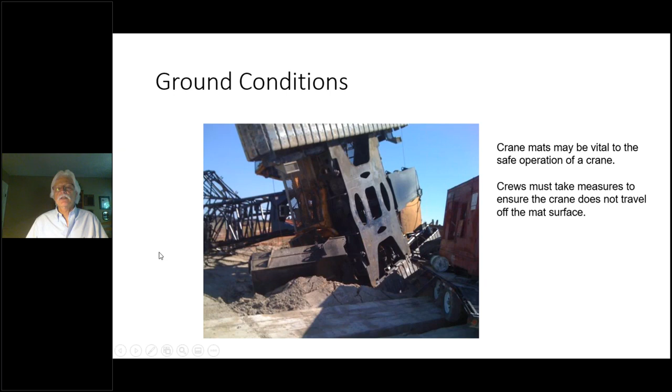How do I know? Because this accident just took place in Houston approximately, I think, last month. This contractor was driving piles. Their pile went off tolerance. It jammed in there. The crane was situated so it was working parallel to the leads, not perpendicular. This is a different crane. They tried to pull this off the pile. They side loaded the boom and it failed. It buckled somewhere just above the boom stops here. And unfortunately, the boom tip landed on a passerby on the interstate and killed the 2 individuals in this pickup truck.

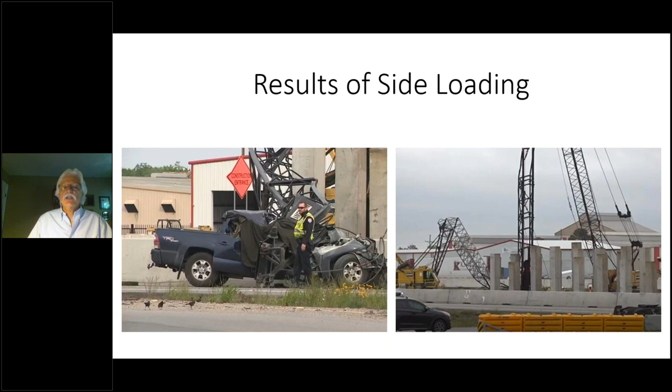So driving piles is actually kind of boring. It's monotonous until something goes wrong, and things can go violently wrong. So paying attention, working within the parameters of what the equipment manufacturer says you can and can't do, training, education, certification, all keys to the success.

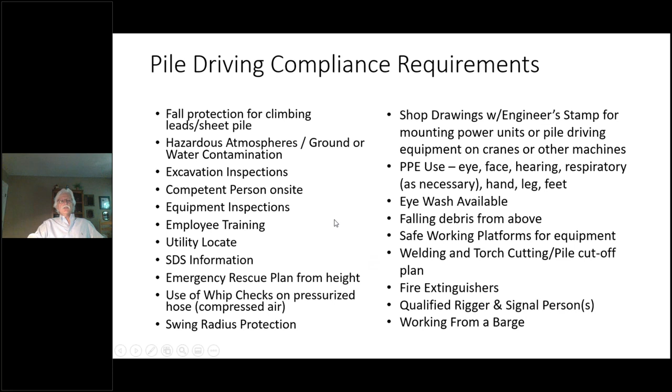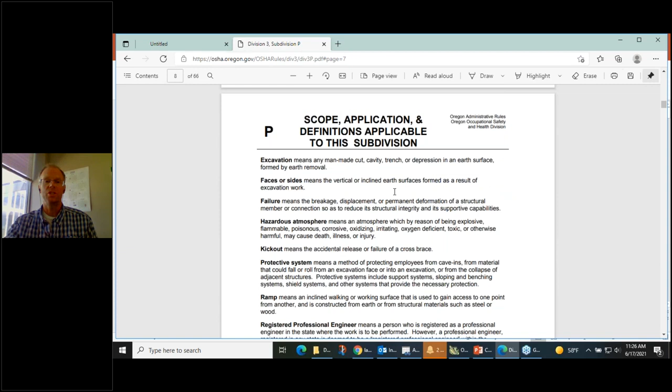So a couple things I'm going to point out here. Probably the most important one for everyone on this call is the definitions. It's really important that you know what definitions we are looking at. In Oregon, as well as federally for OSHA, an excavation means any man-made cut, cavity, trench, or depression in the earth surface formed by earth removal. So most of what you guys are doing very easily fits within the excavation regulations, because you are making a cut, a cavity, a trench, or depression in the surface of the earth by removing earth.

But one of the reasons why we are creating a program directive is because there are activities that put underground utilities in danger, and by extension, put employees in danger through electrocution, shock, exposure to natural gas, fires, explosions. Rick had mentioned drowning, where excavations fill very quickly because large water pipes are damaged. So not all activities that could damage underground utilities are created by an excavation.

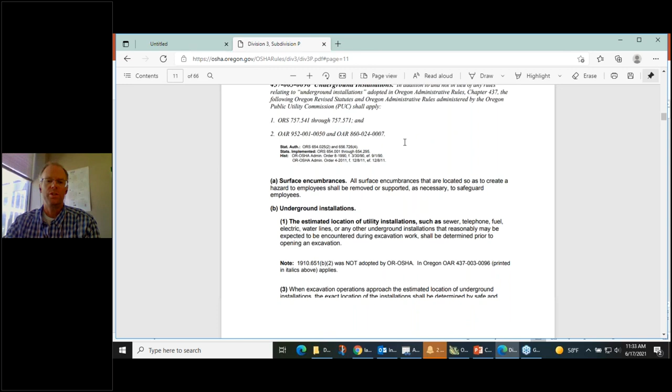So our rules are really basic. Our rules are also a little bit outdated. When we look at the underground utility installation rules, the very first one, which will be covered in the program directive, says...

All excavators have to estimate the location of underground utilities prior to opening the excavation. This isn't knowing the exact location, it's estimating where the utilities are underground. So if you're excavating on the side of a road, is it reasonable that there could be underground utilities such as natural gas, water, or electrical? If the answer is yes, you need to roughly estimate where they are—where would they reasonably be?

Here in Oregon, the OPUC requires you to call 811 and wait the appropriate amount of time for the locators to come out and put paint on the ground to estimate the locations. For Oregon OSHA, that is the best method possible—that's what we want you guys to do.

But Oregon OSHA will actually accept a couple other ways of estimating that the OPUC will not. We'll accept an employer who goes out and hires a private locating contractor and calls that in. Or maybe they hire staff, train their staff, equip their staff, and ensure that their staff are qualified and competent to do their own utility estimating. That's really rare, but if an employer can prove it, we would say it has met the requirements of B1 for estimating the location.

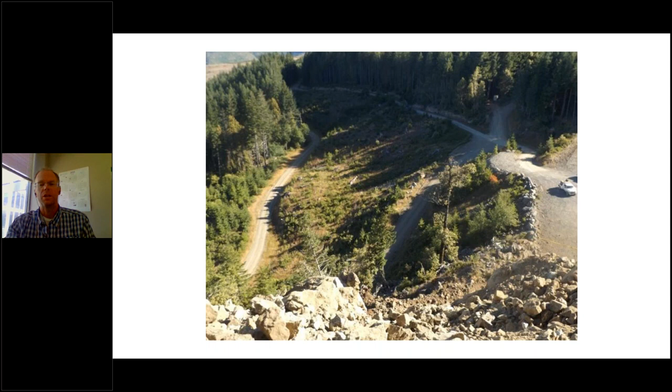This picture is shooting across, and the drilling rig is right up towards the top here, just barely out of view. So it's just another presentation of the landscape we're looking at.

Here's coming up the road that's being pioneered to the top of the knoll and the back of the actual drilling rig. So what we have here is an Ingersoll Rand ECM 490 drilling rig.

What's unique about this? Well, I guess it's not unique, it's an older machine, so it can put multiple sticks on for drilling into the rock face. At the time of the accident there was only a single stick. The sticks are 12 feet long, with a carbide button tip that with this machine could drill about 1 foot per minute into this rock type.

As you can see looking at this rock face, the rock is quite fractured. It's in bad shape, and not as a result of the blasting that has occurred - it was just in bad shape to start with, and then they're blasting on top of it. And then above it we have forest soil and trees, stumps, all sorts of stuff.

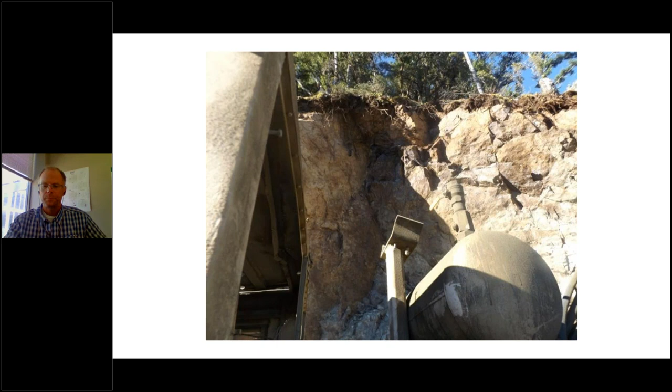So some more pictures here. In this picture you can actually see where the fatality occurred, because all of this jumbled rock came off of the rock face up against the rock drill, crushing the employee right in the middle here as he was attempting to drill way out in front of him with a single stick on the rock drill.

The rock face unexpectedly came down. Now, this rock drill has a single set of controls, on the left-hand side of the machine. So the only way they could do the drilling was with the employee positioned between the rock face and the machine. Newer machines, and other machines of this age, have controls on the left side and the right side, or at the tail at a minimum.

So when we began investigating this, one of the first things we asked was, why did the employee have to be here? And the configuration of the controls partially answered that.

Another view here. Here's a closer up shot of the rock that actually fatally killed the employee. And some more of the rock face - you can see the spray paint up on the wall where they were trying to drill the hole. As you can see, where the rock face failed wasn't where they were drilling. It's areas where they had already drilled, had already scaled, and they thought were safe.

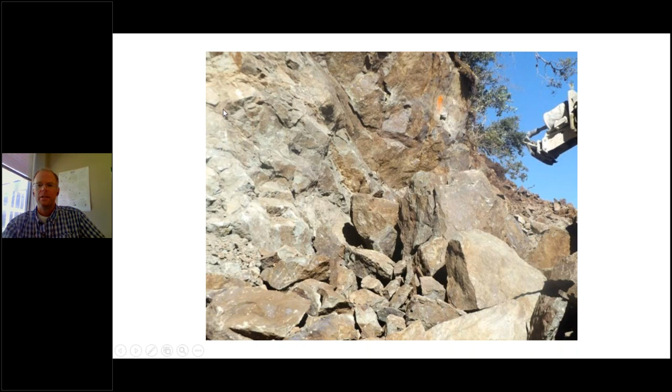Here's the other side - no controls on the other side.

But we did cite them out of our general industry rule for training and supervision. We found that the employee who was killed was still in the process of being trained, and his training was not complete. Most of his training was on-the-job training provided by the owner of the company, the subcontractor hired to pioneer the road up there.

He had done several weeks worth of training and then had a need to fly to Hawaii for business purposes. So he left, and he left the employee in charge of himself, asking one of the other subcontractors on the site to supervise this employee in the work he was doing.

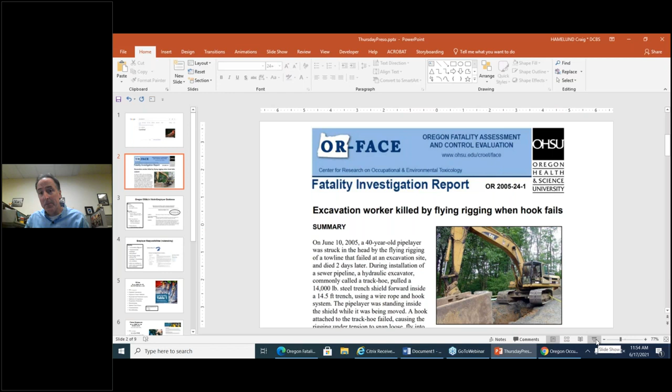First of all, we touched on this earlier when I mentioned that there was a FACE report. FACE is an acronym that stands for Fatality Assessment and Control Evaluation. It's a national surveillance program administered through NIOSH, using grant money to communicate and disseminate information about workplace fatalities. We have our own FACE program here, administered up on the hill at the Oregon Institute of Occupational Health Sciences. So the quickest way to find these Oregon FACE reports is simply a Google search—just type in Oregon FACE, and it is the very first hit.

This was the one that briefly described the fatality we had back in 2005, where the worker was struck and killed by rigging that failed. The wire rope under tension came back once that tension was released and struck the individual in the back of the head. He was in the trench shield while the trench shield was being pulled horizontally. Again, legal to do, but that work practice, as this FACE summary details, can be incredibly hazardous.

I did mention on the agenda that we have a multi-employer guidance document, which comes in the form of a program directive. Brian showed us where all of our program directives live. We have a program directive that details the multi-employer workplace citation guidance that our officers can follow, but like all other program directives, these are in the public domain. We want to be transparent and assist employers, employees, and organizations by providing, in essence, our marching orders. Obviously in the world of construction, but this multi-employer guidance isn't just limited to construction. It can apply to other industries where there are multiple employers represented on the same site.

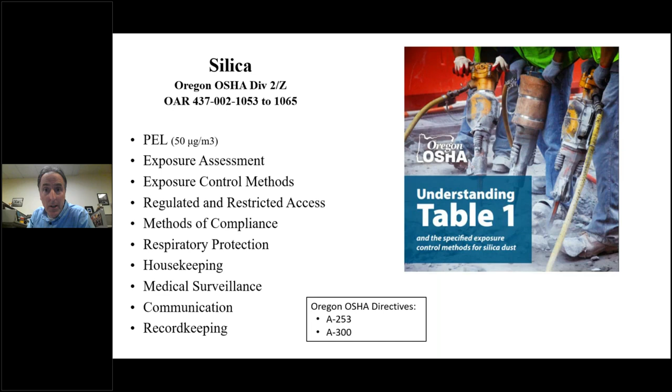Real quickly, as we finish up, I did want to give a quick plug to our consultation program. Our friends up in Washington have a consultation program as well. OSHA consultation is confidential from enforcement. It is no cost to employers as it's already funded, and instead of citations coming in employers' way, a report of recommendations will come in employers' way.